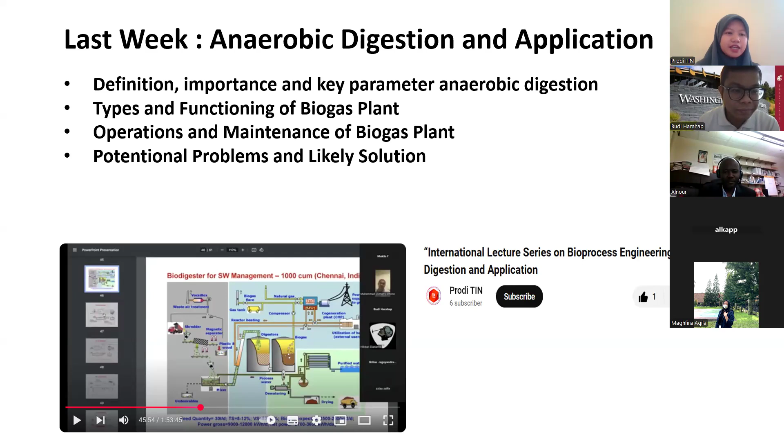And then today we will enter the fourth meeting, the membrane bioreactor or MBR, where we will learn about the main membrane separation process used in MBR and membrane configuration, general MBR concept and terminology, current membrane bioreactor companies and worldwide development.

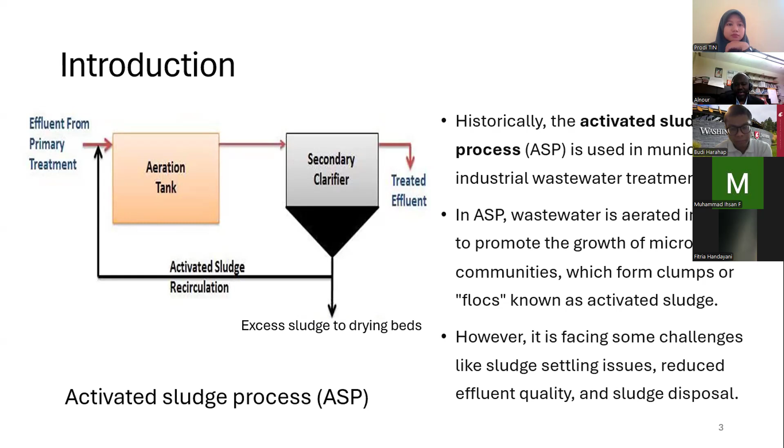Because of these drawbacks, people started to think how to solve this issue, and the idea of membrane technology started. Mainly, the idea started using the same activated sludge process and incorporating the membrane filtration process with it. This idea started in the late 1960s after the commercialization of microfiltration and ultrafiltration membranes, and the first MBR was developed and designed by Dorr-Oliver Incorporation, combining the activated sludge process with a cross-flow membrane filtration system, mainly using cross-flow because it uses tangential flow, meaning we can reduce membrane fouling.

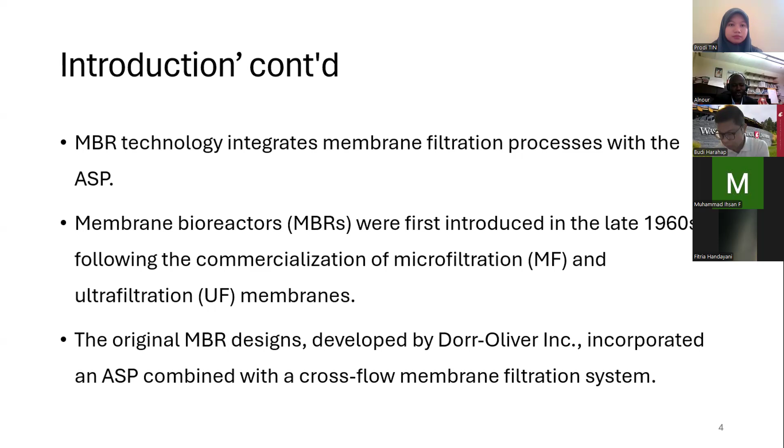After that, a lot of development and work was done in this area. For example, from 1969, an ultrafiltration membrane was used for wastewater treatment, and later a tank was developed for membrane filtration in 1978. The first pilot scale anaerobic membrane bioreactor was constructed in South Africa in 1987. In the 1990s, a lot of work was done in Japan, and the Kubota biogas MBR company did a lot of work in this area, around 10 years of research. After 2000, a lot of dissemination and publication came out in this area, and a lot of work has been done in membrane technology.

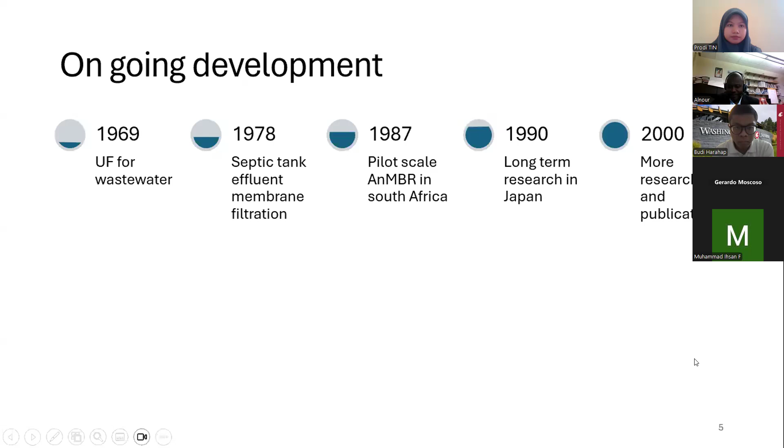I didn't check if everyone is hearing me clearly. Hello? Yes, okay good, that's good. I'm checking if everyone's seeing and hearing me. Yeah, okay, that's great. Yeah, we see your presentation here. Okay, that's great.

As a brief introduction, comparing the activated sludge process with the membrane bioreactor: as shown before, in ASP we only use settling using gravity to settle the pretreated or degraded materials, and the settling cannot always be in good condition, so we can wash out some material. That is one of the main drawbacks, along with the effluent quality.

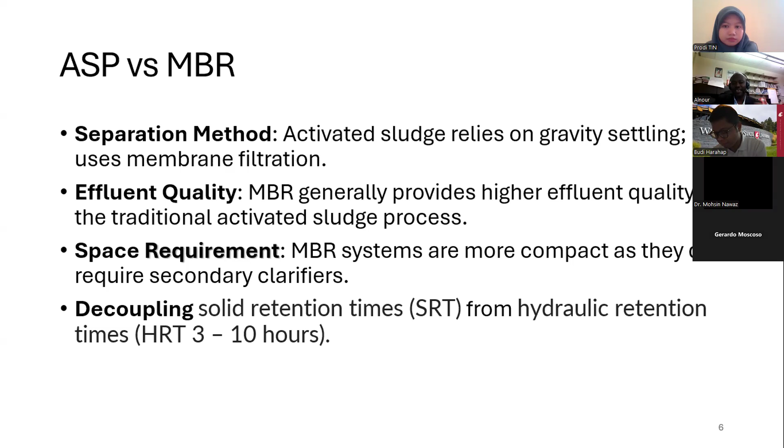When we use MBR, because the membrane can reject back all the solids while getting clear permeate for reuse, it can be reused for different purposes. Also, because eliminating the secondary clarifier in the activated sludge process saves some space, MBR becomes a more compact system.

More interestingly, when using MBR, we can decouple or separate the solid retention time from the HRT, hydraulic retention time. When using activated sludge process, usually HRT equals solid retention time, but with MBR we can separate them, so each can work differently. For example, we can operate at 40 days solid retention time and only a few hours hydraulic retention time, because we can separate the solid from the liquid. We take the liquid out through the membrane while leaving the solid inside, and we waste the solid from time to time, with the amount wasted calculated based on the desired solid retention time. This is the main benefit.

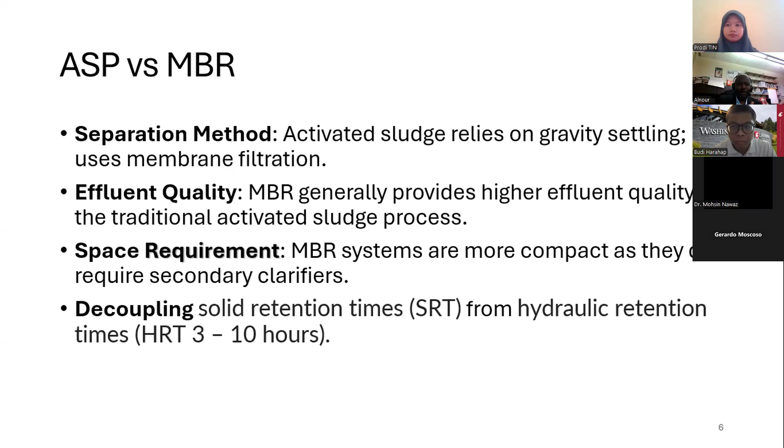So when we have liquid effluent with high strength, we can benefit from this, pumping the water out as quickly as possible while maintaining the solid inside.

In membrane bioreactor technology, commonly there are two types of membrane filtration processes used: microfiltration and ultrafiltration membranes. There are other membrane separation processes like reverse osmosis, nanofiltration, and pervaporation, but these are not used in MBR. The common membranes used in MBR are microfiltration and ultrafiltration membrane processes.

These two membrane processes differ mainly in pore size. The ultrafiltration membrane has a tighter pore size compared with the microfiltration membrane. The pore size for ultrafiltration could be less than or around 1 nanometer to 100 nanometers, compared with microfiltration which can reach up to 10,000 nanometers.

When the pore is so tight, you need to apply higher pressure to pump the liquid out of the membrane, so ultrafiltration requires slightly higher pressure. With higher pressure, the thickness of the membrane should also be a bit bigger, because it needs to be strong enough to withstand the higher pressure.

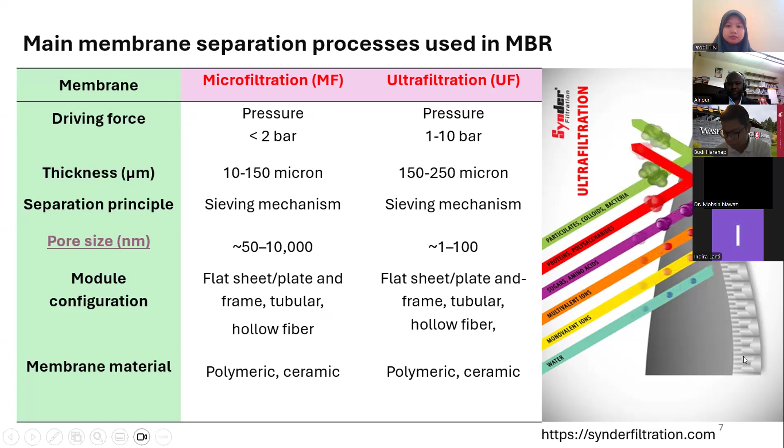When you operate the membrane, before operation you can see the pore using SEM, but later, due to fouling, most of the small pores can become constricted or clogged by the fouling. This can only be seen through SEM images or other tools.

I have a question for you guys: what do you think are the main advantages of using a submerged membrane bioreactor over a side stream membrane bioreactor, or vice versa?

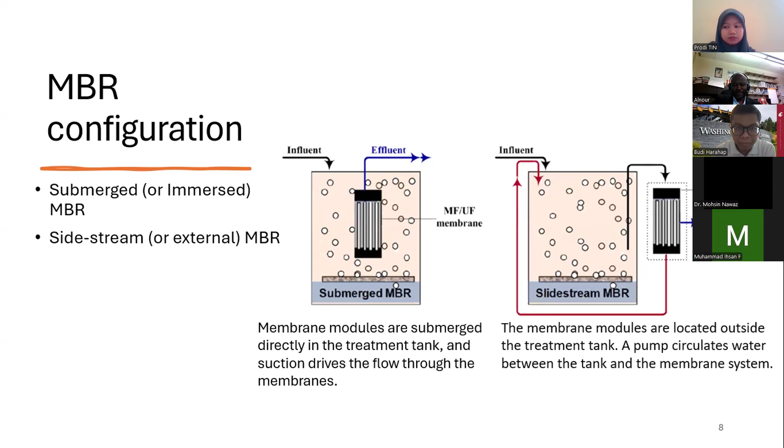Each of them has its own advantages and drawbacks. I'll show you some key points. When the membrane is submerged inside the reactor, the design is definitely simpler because it's one unit and everything is compact. We can also reduce energy use, because with an external membrane you need to recycle the water back using pumps and piping, which adds more energy to the system. It's also a compact design with one unit, and has lower capital cost since you have just one unit instead of two separate units.

There are also some drawbacks. When the membrane is immersed inside the system, the surface area of the membrane is reduced because it's governed by the reactor size. You have to design the module based on the reactor size, so when you put the module inside, you end up with a smaller surface area, and a small surface area means you get less flux.

And also when you put the module inside the system, it also can be damaged because a lot of the obstacles and stuff inside the system will be designed there. And usually the membrane will foul more often. So if you need to clean the membrane, you will also face some challenges. Most likely you need to get the membrane out and then clean the membrane.

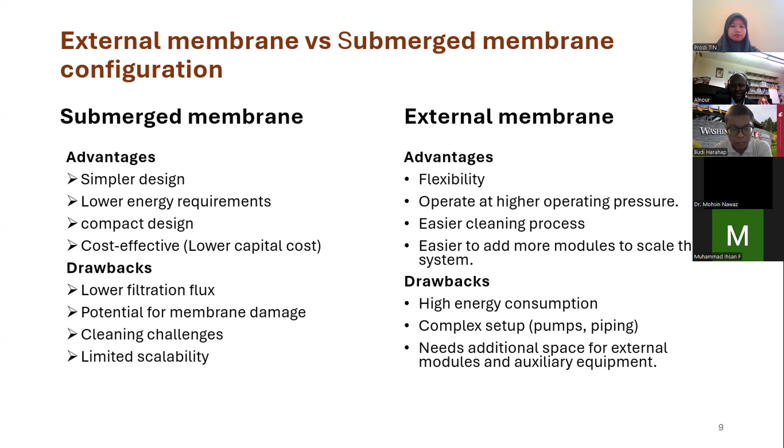To select between these two membrane bioreactor configurations actually depends on different factors. For example, if you care about energy efficiency, I think you need to go for the submerged membrane because it will be one unit with less capital cost and also less pumping and piping. But if you care about ease of maintenance, like cleaning the membrane and the fouling, I think the external membrane will be the right choice for you.

And in terms of space constraints, if you have a tight place, I think you need to consider the submerged membrane rather than the external one because you need a wider space to fit the two systems. And in terms of cost consideration, I believe the submerged system can be a little bit cheaper because you have just one unit compared with the two-unit system. In terms of process control, I think the external system will be better because of ease of operation and controlling all the parameters.

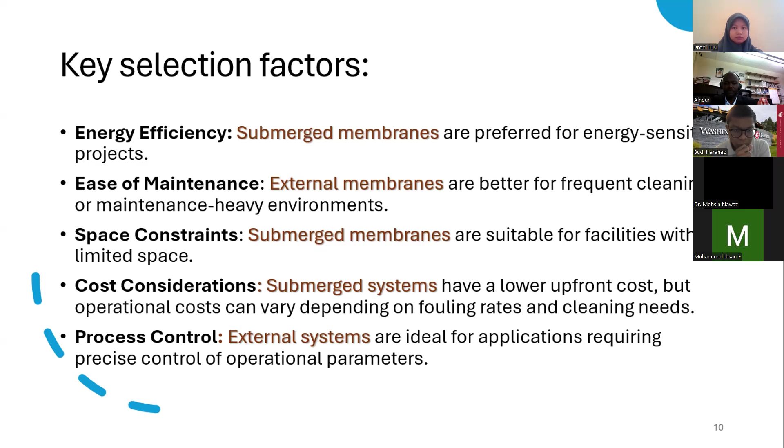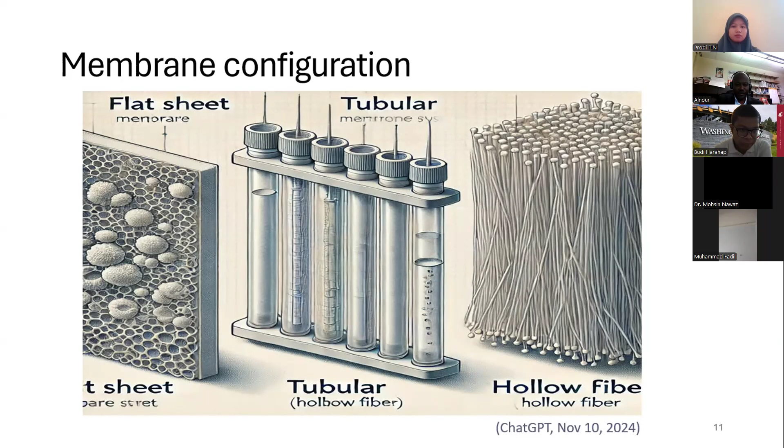After we talked about the MBR configuration, right now this is the membrane configuration. The membrane also has different configurations. The main configurations used in MBR are three: flat sheet, tubular membrane, and hollow fiber. We have other configurations like spiral wound membrane or capillary membrane, but they're not common in MBR. These are the three common configurations of the membrane used in MBR, and we're going to show a little detail about each of them.

The flat sheet configuration is usually just a thin flat sheet membrane, and usually this will be constructed in module form. Such a configuration has some advantages because the durability is high for the membrane, and it's used a lot for wastewater applications.

Compared with that, the hollow fiber membrane is usually just a straw-like fiber with a hollow opening in the center. This one is ideal for large scale wastewater. It has a bigger surface area compared with the flat sheet one because we have different bundles. Each bundle contains a lot of pores around. That means you have a compact and small module, but the surface area and the flux can be higher for this one.

And when we go to the tubular or multi-tubular membrane, it contains different channels, and this one is very durable and a rigid membrane. It's usually used when you have wastewater with high solid colloids, and also when the viscosity is high, you can use the tubular membrane.

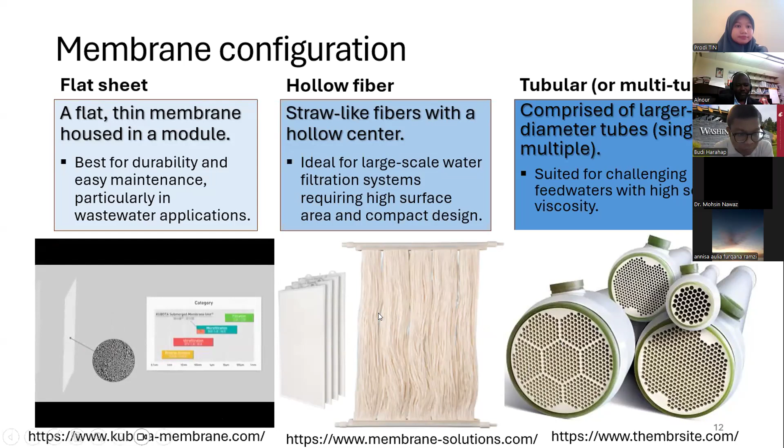Actually, I just need to show the configuration. The membrane unit will be configured from different materials, the supporting material and the frame, and then the membrane will be inside. Later it will look like this: the membrane, the supporting material and the frame. The unit will be like this, and they can be configured in modules. All of them can be modules, and you can add more modules, and then this one is actually used externally.

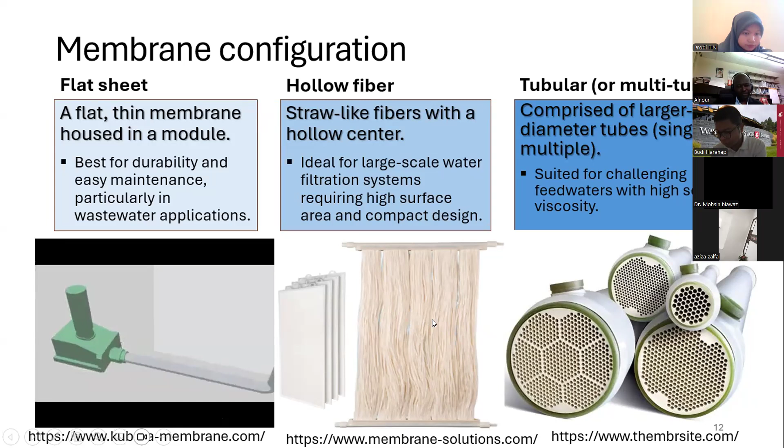This is the reactor tank, and here you have the membrane tank, and then you can get clear effluent for reuse. And this is actually in application right now with the Kubota membrane company. Okay.

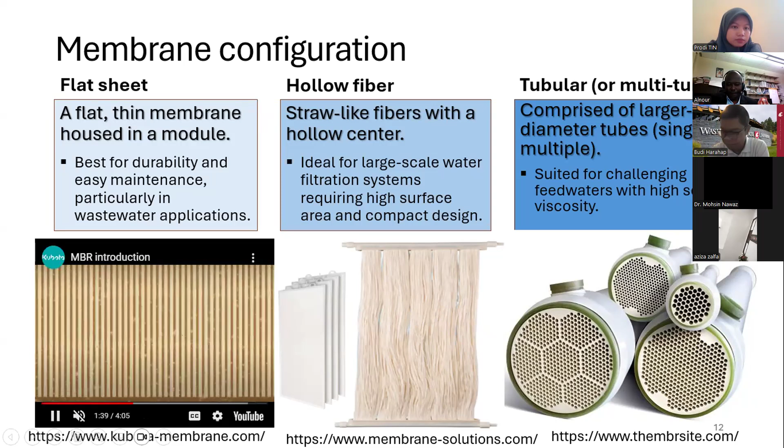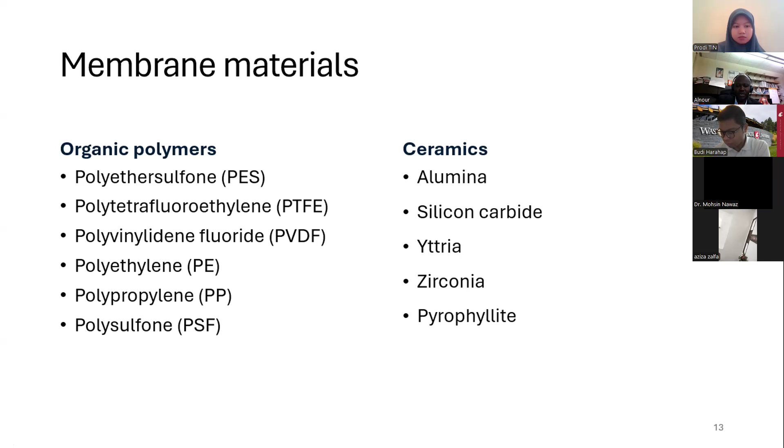Here are some pictures showing polymeric membranes. This is a flat sheet membrane, and you can cut whatever you need and then construct your membrane module. Actually, I worked with this flat sheet membrane a lot also.

You will get the flat sheet, and then you will design your membrane module. You need to get the supporting materials and then the protective material, and then the membrane will be inside. You will design your membrane based on your reactor size. It will have two sides, and then you will calculate the surface area from the two sides of the module.

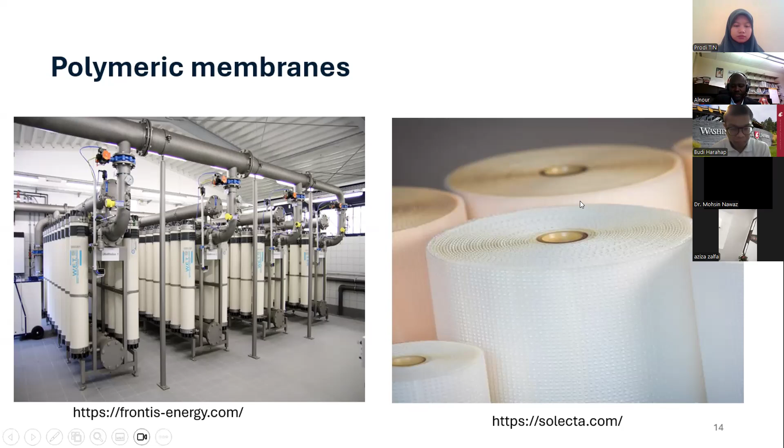And then based on that, you will calculate your flux and your filtration. The second sort of membrane here is the ceramic membrane. Also, in this cross section of the ceramic membrane, actually a lot of it is supporting material, and then an intermediate layer, and then you get the thin layer here, which is the membrane. But actually the outside, all of it is just supporting material. Exactly when you construct the flat sheet, you also need to put a lot of support, otherwise you will damage the membrane, mainly when you immerse the membrane inside the reactor.

And ceramic membrane can also be multi-channel or multi-tubular membrane, as shown in this picture, or can be flat sheet ceramic membrane, and can also be hollow fiber membrane. Actually, polymeric membrane also can be in the form of hollow fiber. Actually, we worked with the Zenon company before, and we worked with the hollow fiber polymeric membrane to see its performance for some time.

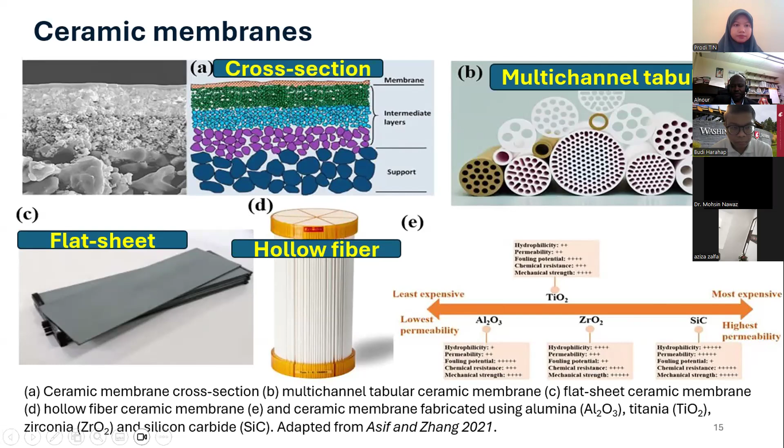As mentioned before, the ceramic membrane is actually constructed of different sorts of material, like aluminum oxide, silicon carbide, titanium dioxide, or zirconium dioxide also. Some of these materials can be used to build or manufacture the ceramic membrane.

Actually, in the second section here, I'm going to introduce some concepts and terminology you will commonly hear when you work with MBR, membrane bioreactors. I'm just listing some of them here, but we're going to focus on some of them in detail later. For example, membrane characteristics, and here mainly we talk about membrane pores.

First, you need to do some characterizing, an initial characterization of the feed water to see your material, and then based on that you will select the pore size of the membrane, and you also need to consider other factors like the surface charge of the membrane, the hydrophilicity and hydrophobicity of the membrane, and contact angle. There is a lot you can do to characterize the membrane based on the feed you need to handle. And also you will hear a lot about the flux.

Actually, when we're working with MBR, we have two different terminologies. Some terminology is related to the membrane and other terminology is related to the reactors. This section is mainly related to the membrane. So later I'll introduce some terminology related to the reactors instead of the membrane.

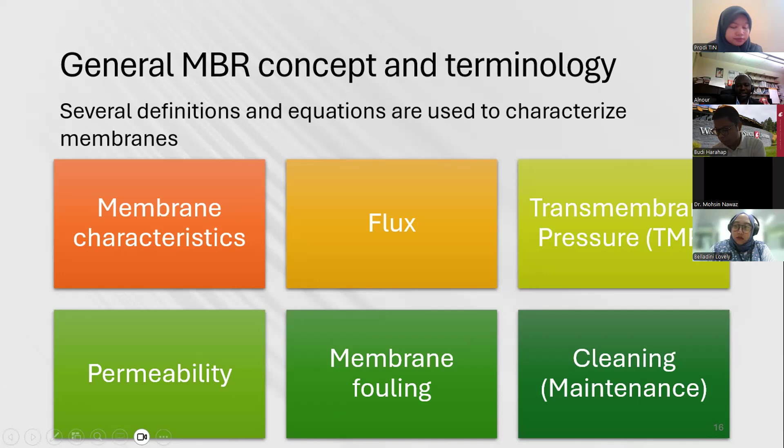And on this point, we're going to show what membrane fouling is and how it can be cleaned later, and the maintenance or cleaning steps. One of the main terms for the membrane module is membrane flux, and the flux is how much permeate can pass through the membrane per unit of membrane. So we have a membrane module, and how much liquid can be pumped out through the membrane. This is called the membrane flux.

And usually we calculate it as, for example, liters per hour per square meter of membrane, and it mainly depends on the membrane surface area, as volume per certain time per surface area of the membrane. And usually the term used instead of liters per hour per square meter is LMH. People commonly use this when operating MBR, and you will hear it more often.

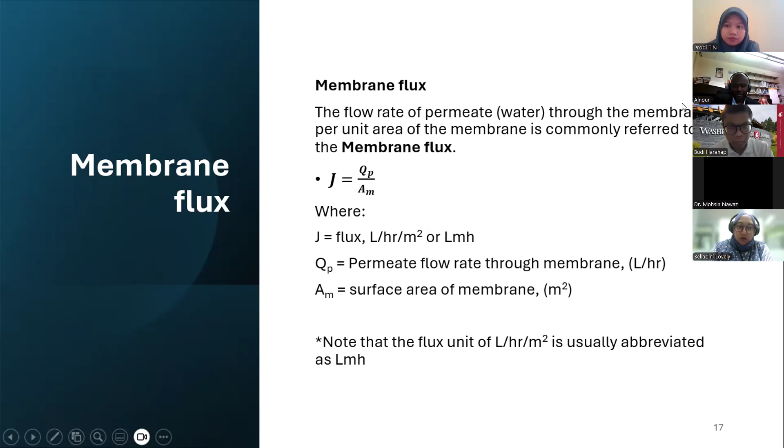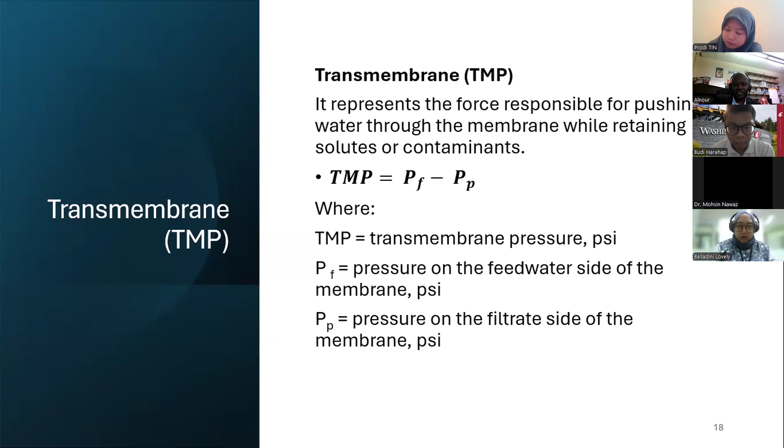The transmembrane pressure mainly is the pressure difference between the feed water side and the permeate side. The difference of this pressure is usually called transmembrane pressure. Usually transmembrane pressure and flux will be combined, because the TMP usually drives the membrane flux.

So we can construct the relationship between them: the flux at a certain temperature can be calculated as the TMP divided by the total resistance and the viscosity of the effluent treated by the membrane. We use this terminology mainly when we're talking about membrane performance. Usually we use this terminology and equation to calculate and see the performance of the membrane.

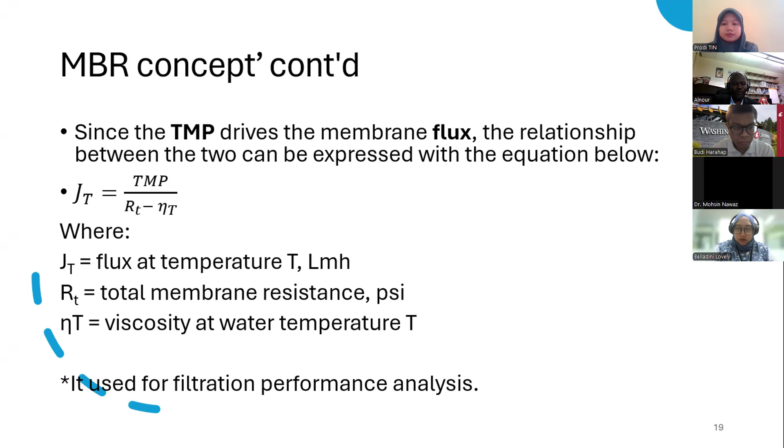And when we're talking about fouling, we have different sorts of resistance. The total resistance can be a combination of the membrane resistance plus fouling and plus cake layer resistance. And membrane fouling can be divided into different sorts of fouling: inorganic fouling, organic fouling, permanent fouling or reversible fouling. We need to consider that when working with a membrane bioreactor.

The RM, or membrane resistance, is called inherent membrane resistance, and this is due to the membrane material. This will be just there. The second one results from the building of material inside the membrane pores, making the membrane pores tight and creating resistance called fouling resistance. And other people, as I said, usually divide this into different sorts of fouling and the cake layer.

And when the TMP increases during the operation, that means the cake layer most likely is building on the membrane surface. This mainly depends on the type of the wastewater used and the characteristics of the wastewater handled with the membrane.

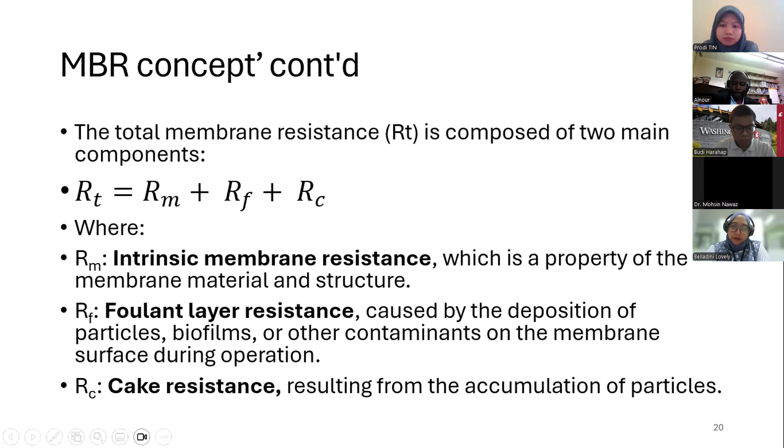Above all, we need to take into consideration the viscosity of the material, because the temperature can be different from operation to operation and from climate to climate. So usually we need to unify the condition. For example, to compare the permeability across different conditions, we need to normalize, called normalized flux or standardized temperature flux. Commonly we measure the permeability at 20 degrees Celsius, so it can be compared across different operating conditions.

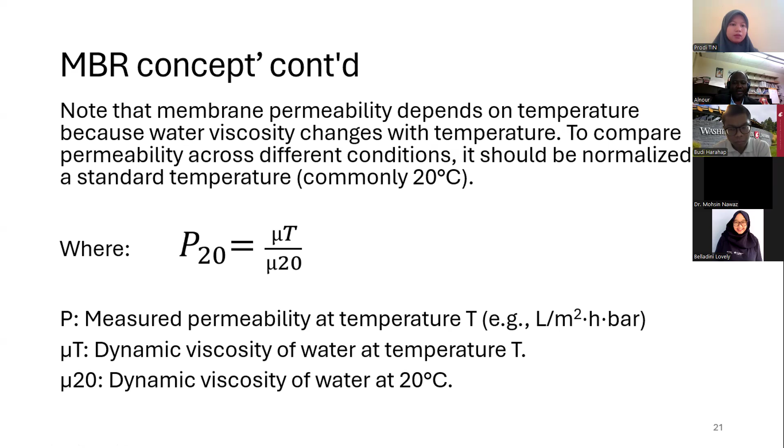Because, for example, if you tested your permeability at room temperature, you need to apply the viscosity at room temperature, and later you need to normalize it to 20 degrees Celsius to be comparable with the other operating conditions. More often you will hear it when comparing the permeability of the membrane under different conditions, for example, solid retention time, hydraulic retention time, or organic loading rate.

After we talked a little bit about the concepts related to the membrane, here we have some concepts related to the reactor, the digester. More often you will hear about the operating conditions: solid retention time, mainly how long the solids remain inside the reactor, and also the organic loading rate, how much organic amount will be loaded to the system in a certain time, based on the reactor volume.

As a second term, commonly you will face the hydraulic retention time, and as I said before, MBR decouples the solid retention time. We calculate the solid retention time separately from the hydraulic retention time. But when you're using the activated sludge process, the solid retention time will be equal to the hydraulic retention time, HRT, because there's no way to separate them in the activated sludge process. But in the MBR they are decoupled. You can have a longer solid retention time and a shorter HRT.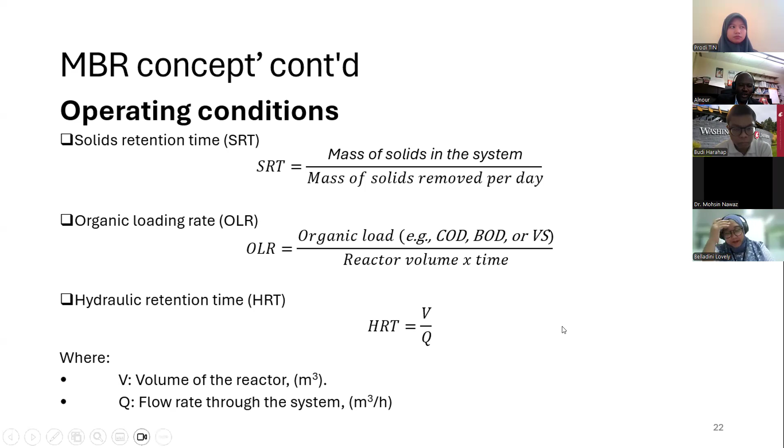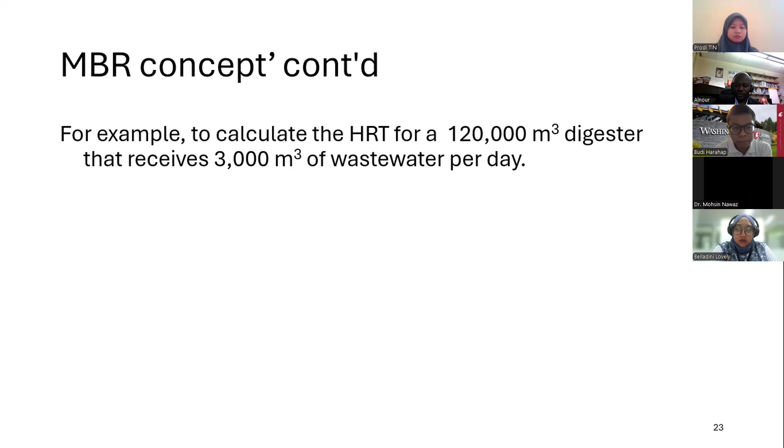And here I'll show you a simple way to calculate such a concept. For example, to calculate the HRT, if you have a reactor with 120,000 cubic meters, and you pump inside around 3,000 cubic meters of wastewater per day, simply divide the reactor volume by the influent getting inside the reactor, and you will get your HRT of around 40 days. We can make it, for example, 40 days for HRT, but 60 days for the solid retention time. We can separate them.

And when working with MBR, the HRT can be so short, it can actually be hours. Instead of days, it can be hours, but the solid retention time can be a few days. That's the main advantage of using MBR.

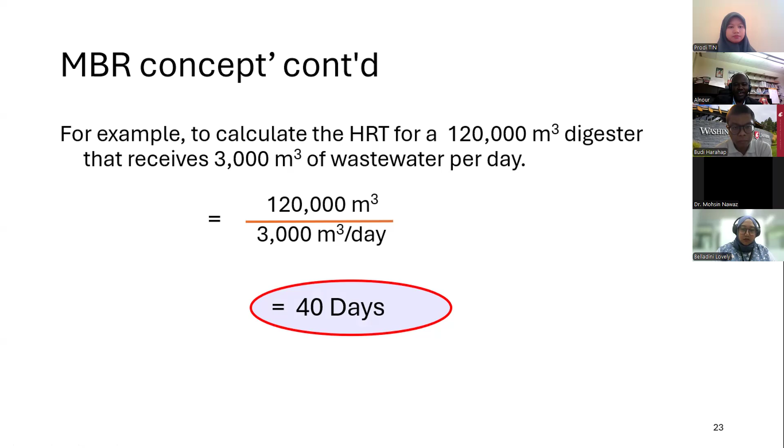And actually, the organic loading rate usually will be calculated based on the organic material added to the system. This organic material can be measured in terms of the volatile solid, or in terms of the COD or BOD, chemical oxygen demand or biological oxygen demand. We can calculate it based on that to see how much the organic loading rate is for the system, because the organic loading rate can affect the performance.

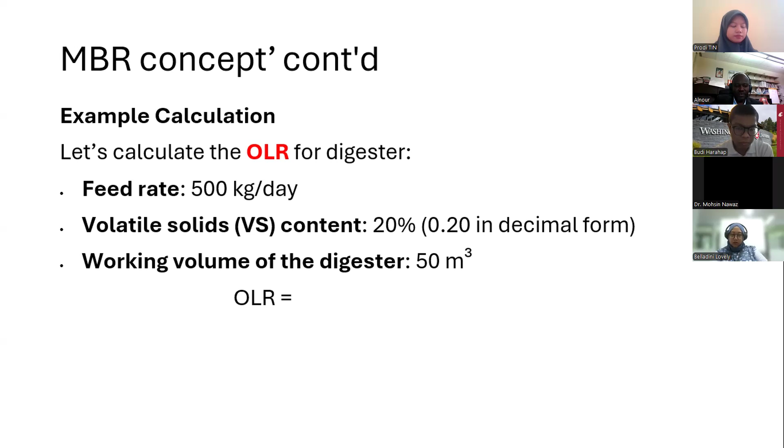For example, a higher organic loading rate can deteriorate the performance because it can lead to the build-up of acid in the system. When the acid increases, the reactor will be upset, and most likely this can lead to reactor failure. So you need to consider that, and also what sort of wastewater you are handling. Then based on that, you need to select your design parameters, for example, organic loading rate and HRT. HRT can also affect the system performance, so you need to consider that.

For example, if we have a feed rate of 500 kilograms per day added to the system, and a substrate with volatile solid content around 20% or 0.20, then we can calculate the organic loading rate by multiplying the amount added by the concentration and dividing by the reactor volume. Usually we express it as kilos of VS or kilos of COD per cubic meter per day, cubic meter in terms of the reactor size, and day in terms of the time.

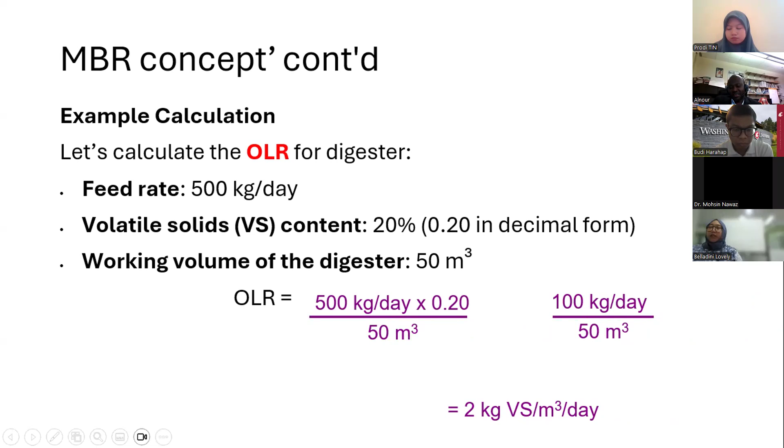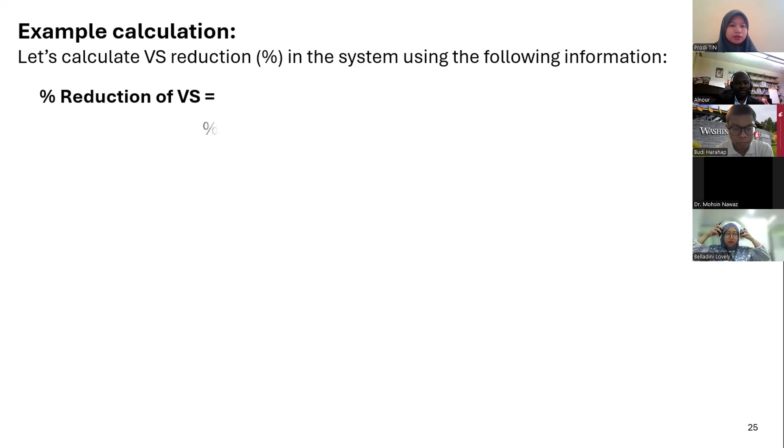When operating the reactors, you also need to calculate the degradation of the VS or COD. Usually we measure the COD or volatile solid in your feed, and then after digestion, you measure the material in the digestate, and take the difference between them to get the solid reduction percent. It can also be calculated for the total solid or the total suspended solid, whatever term is used to evaluate your reactor performance in terms of organic matter degradation.

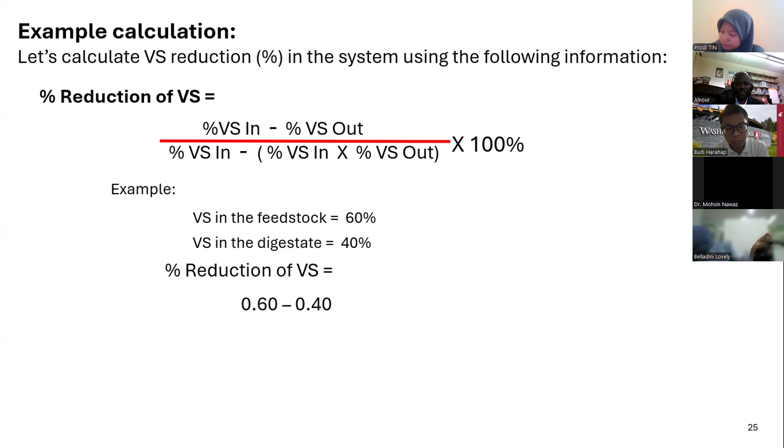For example, if we have a feed with VS 60%, and in the digestate we measure VS around 40%, then we can simply do the calculation to get how much degradation efficiency we achieve under that process. Alternatively, we can calculate the percentage difference between them to get how much material degraded, or the percentage decrease of the materials.

The reduction percent also depends on the substrates. With some substrates you can get higher degradation efficiency, like 60 or 65%. For some materials like lignocellulosic material, the degradation efficiency will usually be a bit lower, around 50 or 43%. This is in terms of the volatile solid.

However, when using membrane technology, we usually reject most of the solid inside, and the solid gets more time to be degraded while the effluent goes out. The permeate will usually be clear, so we measure the COD concentration of the permeate and compare it with the concentration of the feed. The COD degradation efficiency will be very high, reaching around 98% or so, because the membrane rejects all the solid, reducing the waste sludge.

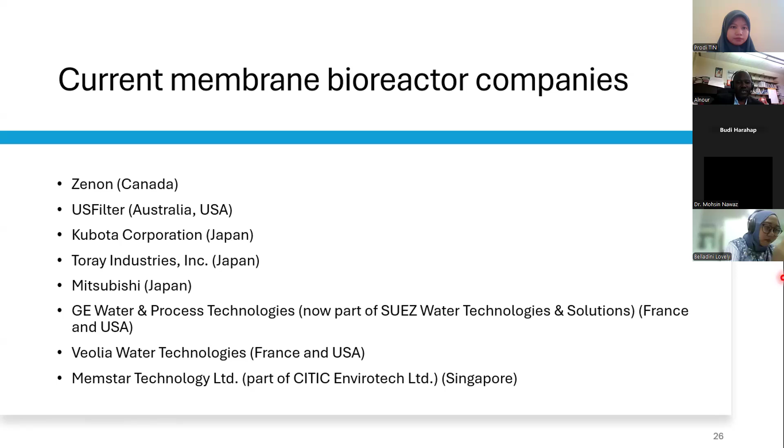A lot of the publication and development happened after 2000, and people started to understand membrane configuration and how to operate the membrane, because it's tricky to operate. You need to be trained well to operate and to do the maintenance and fouling cleaning and install the system, compared with working with the activated sludge process, which is a simple process and not much challenging. Usually it will be operated in aerobic condition for activated sludge process. So it's not easy to operate the anaerobic MBR, because you need to be trained to maintain the performance.

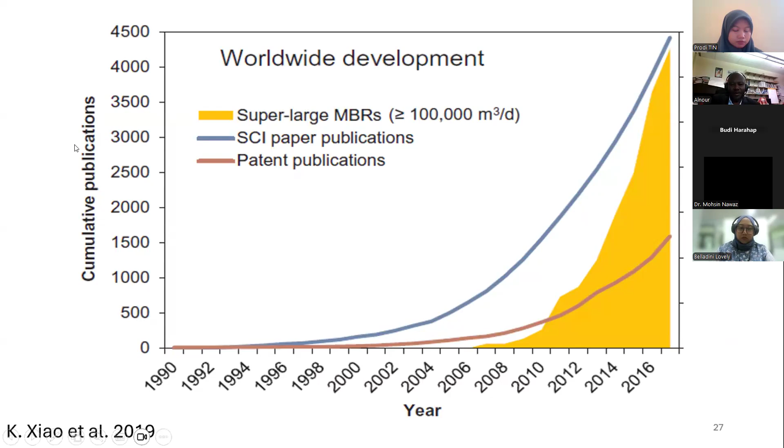In terms of the applications - sorry, let me just get a little water. Sorry, guys. No worries, take your time, Alnour.

In terms of the application, not much left to say - I think I've used a lot of time. I'm trying to go fast, but still keeping this process thorough. MBR is commonly used in municipal wastewater treatment everywhere in the world, because municipalities usually use the activated sludge process right now to get effluent. To get clear effluent for irrigation or other applications, you can apply MBR instead of using activated sludge process or other conventional systems.

It can also be used in industrial wastewater treatment. In Canada, I visited some pulping companies, like Resolute, using MBR - using direct filtration and MBR as a digester to produce biogas, which can be used to generate energy. You also get clear permeate, almost looking like water, that can be reused again in the pulping process, because in pulping we use a lot of water. So instead of discharging that water out - and there's a lot of restriction and limitation on discharging effluent, so it's not really possible.

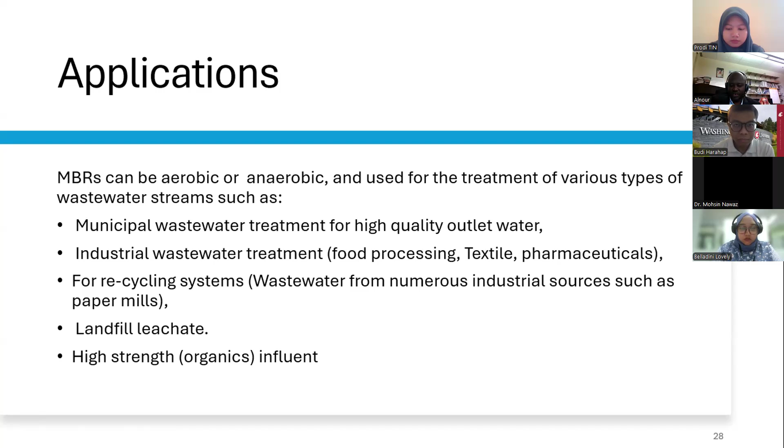Definitely, working with MBR or the activated sludge process, you have some challenges. But the main challenge when operating MBR is the maintenance and cleaning of membrane fouling. Membrane fouling is simply the build-up of material on the membrane surface or inside the membrane pores, which reduces the permeability or flux of the membrane. So we have to clean it more often, scheduling maintenance cleaning from time to time - could be monthly, could be 3 weeks - to maintain your flux. If you don't maintain your flux, you usually need to apply more pressure.

Applying more pressure means using more energy, and using more energy means wasting a lot of money. So cleaning the membrane and opening the pores means the flow rate of the flux will be maintained, while also maintaining low energy cost - because when material builds up on the membrane, pushing the liquid out requires high pressure, and high pressure means high energy. Also, some costs will be associated with MBR compared with the activated sludge process, because you need to buy the membrane module, which is a capital cost that increases operation and energy consumption.

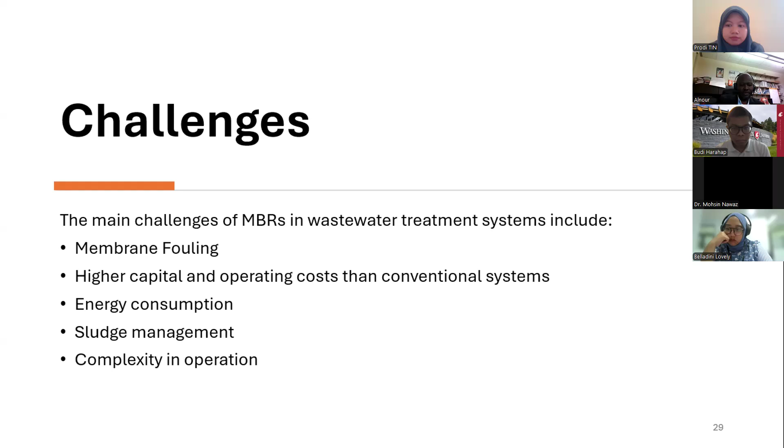In this section, I'll show you what the main challenge actually is in MBR - what is membrane fouling? As I said before, it's the accumulation of unwanted material on the surface or within the pores of the membrane, which reduces the performance - mainly the flux. The flux will be less.

Usually we operate the membrane under constant flux or under constant pressure. When you operate under constant flux to maintain your flux, that means the transmembrane pressure will increase with the build-up of material on the membrane surface.

So you need to understand membrane fouling, and you need to do your cleaning maintenance for the system. A lot of work and publications—we published several papers related to membrane fouling characterization and membrane fouling cleaning. From our 2018 paper published in Bioresource Technology, we showed how we can characterize or categorize membrane fouling.

It can be like pore blocking, where at the beginning materials build on the pores. Over time, the membrane can also adsorb some materials with operating time, or you can get a cake layer forming throughout the membrane surface, and also a gel layer. These differences depend on the feed characteristics, such as industrial wastewater or municipal wastewater, and can vary, or you can get a combination of cake layer and gel layer based on the materials.

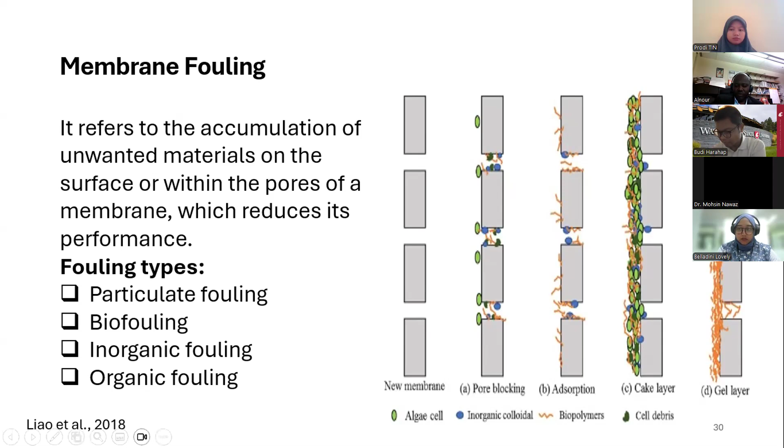For process design, you need to operate your membrane under certain conditions in terms of HRT and solid retention time. We notice that when the solid retention time is longer—meaning older sludge age—a lot of material will be degraded, and only inorganic material will be left over, causing inorganic fouling with longer digestion time. Also, when operating with higher organic loading rates, a lot of organic material gets inside the reactor, which can build up and create challenges. So you need to figure out your organic loading rate and also your flux.

More importantly, you need to operate under constant flux or constant TMP—then you can operate differently. You should stay below the critical flux; otherwise you will increase your TMP and need to do repeated cleaning processes using chemicals, which is also associated with cost and labor.

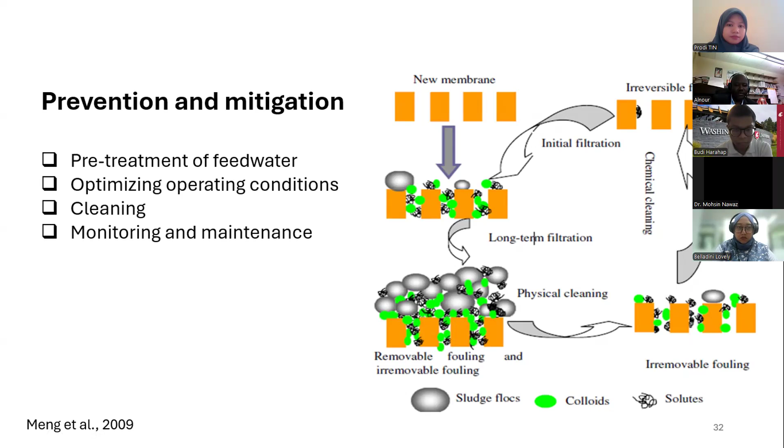Since I finished my presentation, most of this work is from a book chapter we published in 2020 about anaerobic membrane bioreactor basic process design and operation. This is part of a nice book, Current Developments in Biotechnology and Bioengineering, published by Ashok Pandey. He was the editor-in-chief of Bioresource Technology. This book is out there now. If anyone is interested in more details, you can access it and read about the basic process design and operation of MBR. A lot of nice stuff there.

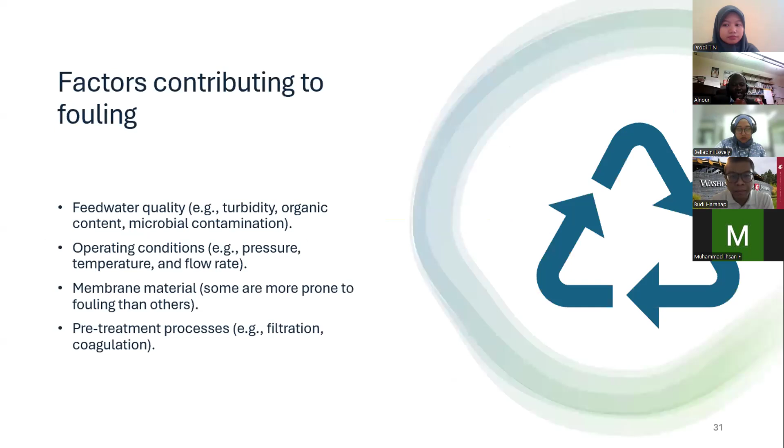We also have another question from Abian. Abian is a student from the Faculty of Agroindustrial Technology, and he wants to ask what kind of wastewater is more suitable for submerged membranes or for external membranes. What kind of wastewater? I mentioned here, the submerged is for municipal wastewater. If you use submerged, yes,

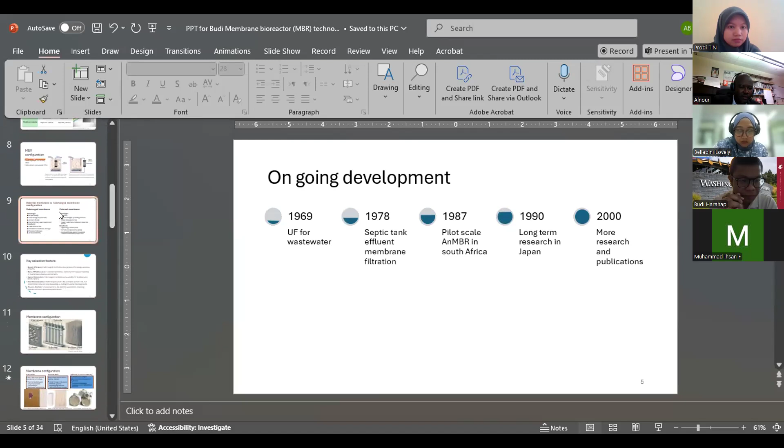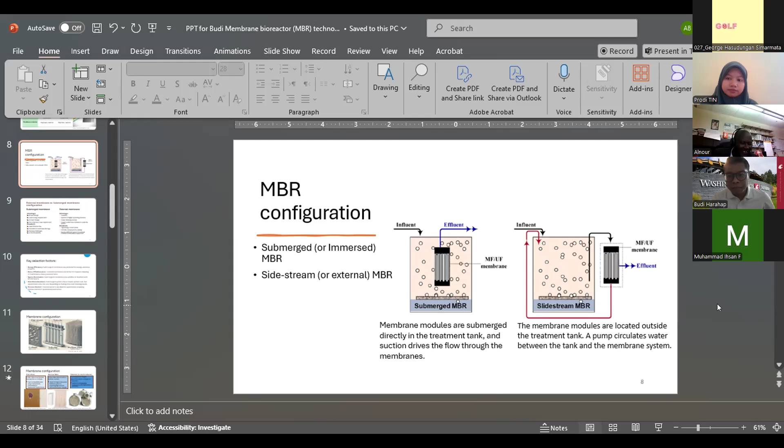Or maybe I didn't mention it. Yeah, I think I didn't mention it. But the submerged one is commonly used for municipal wastewater treatment. For industrial wastewater, most likely the side stream configuration of the membrane is applied. I mentioned it somewhere, but I forgot where. It's okay. So does it answer the question, Abian? Yes, sir. Thank you, sir.

And then we also have another one from Bu Aisyah. Bu Aisyah, are you here? Yes. Thank you, Mr. Budi, and thank you, Dr. Alnour, for the insightful presentation. My name is Aisha from UNTED. I have a question regarding your discussion on membrane bioreactors. You mentioned that the membrane materials used are generally polymers and ceramics.

Is there a possibility? Actually, for me it's hard to hear you. Budi, are you hearing clearly? Yes. You can just translate it for me. Oh yeah, sure. Go ahead, Aisha. Hello. Are you using a headset or not? No. Okay. There is an echo, that's why it's not clear when you talk. Sorry.

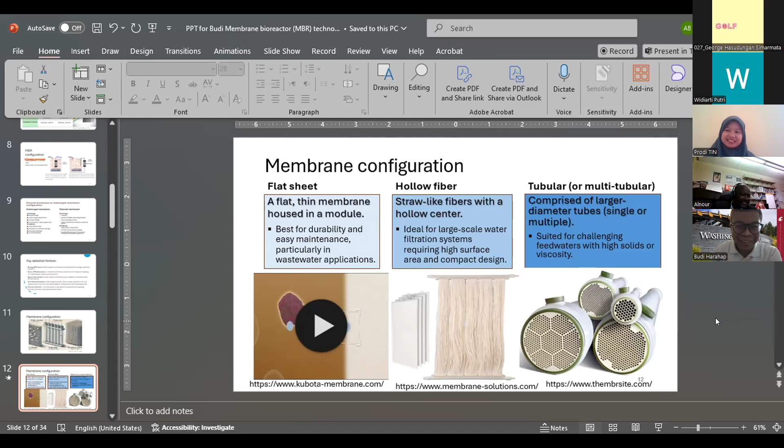So how's the answer, Aisha? Do you have any follow-up questions? Okay, enough. Thank you, Doctor, for the answer. Okay, thank you, Aisha. Aisha is one of the lecturers in our department too. Okay, that's good. So we have a lot of lecturers here. That's great. There is another question here from Martin. So is Martin here?

Yes, sir. So go ahead. Okay, first of all, good morning all. I'm Martin Etans Manulang from Padjadjaran University, Agroindustrial Technology. I want to ask about the industrial sector. I have a plan to do industrial wastewater treatment. Between external membrane and submerged membrane, which one would you choose for the application of industrial wastewater treatment? Thank you, sir.

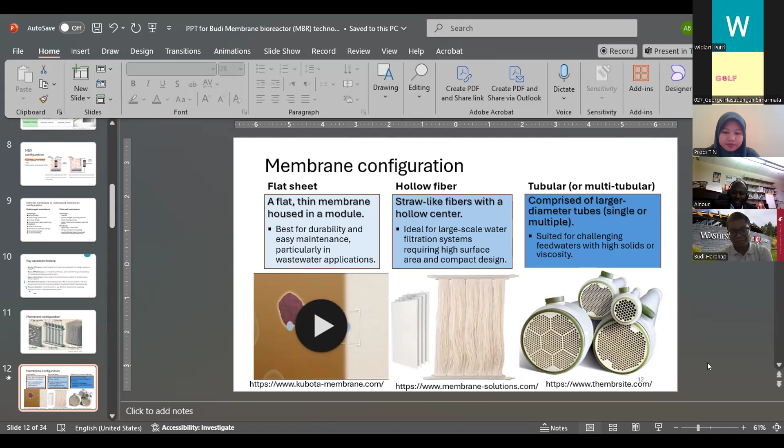And mainly if your system also uses an anaerobic condition, I think going for the external is a good option instead of opening the system from time to time and disrupting the performance of the reactors. But if you're thinking of applying it in full scale later, you need to consider, for example, where it will be applied and the space of that area, and other considerations like energy availability. With the submerged one you use less energy, and with the external one you use more energy.